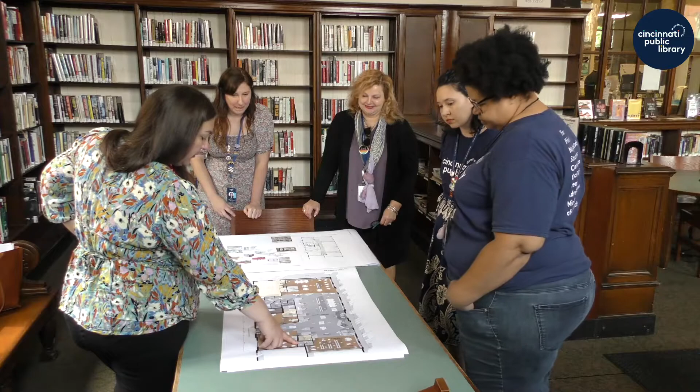When we embarked on this journey to re-envision the Madisonville Library in 2019, we were not certain what that meant exactly, aside from creating an accessible library. What we did know, however, was how much the community loved their library, and that the library was a social hub, or anchor if you will, of the Madisonville community. So that's where we started, with you all.

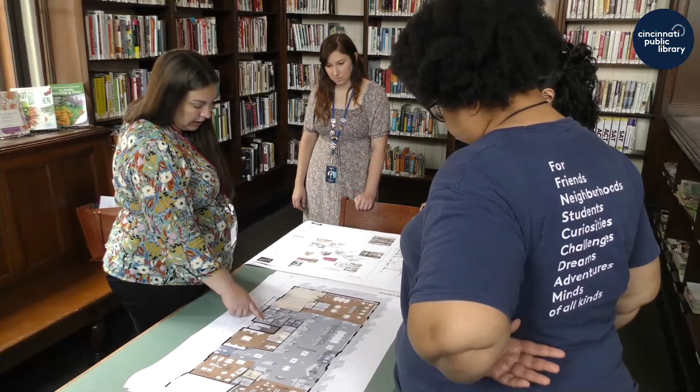Before any actionable plan was made, we wanted to first hear from the community on how you currently use the library. We held three community listening sessions, as well as three targeted focus groups, not to mention our day-to-day conversations with visitors, many of whom were unable to attend our formal sessions. It was through all these conversations that helped inform the library's vision and plan for developing a next-generation library for the Madisonville community. You all helped us better understand how our library currently supports the community, as well as envisioning how the library could enhance services in order to better meet the needs of everyone.

Through these conversations, we learned the community is looking for a library that is accessible and inclusive, not just in accessing the building, but accessible services throughout. Flexible and inviting spaces for everyone to gather and congregate simultaneously, including delineated spaces. A youth-centric facility with engaging and dynamic programming opportunities, especially targeting our after-school crowd. Increased access to technology, including laptops and makerspace equipment. Access to a more comprehensive and dynamic collection, and a fully furnished meeting space for the community.

Whether we are creating vibrant spaces for our after-school crowd or creating an environment for customers to browse the collection comfortably, it was apparent creating flexible spaces was a priority. As GBBN takes us through the design layout, we are hopeful everyone sees their needs reflected in the design. But first, I will hand it off to our customer experience manager, Justyn Rampa, for just a quick review on the facilities master plan, which led us to where we are now.

Thanks, Terry. Hello and welcome to our video presentation of the Madisonville Design Reveal. I am your Customer Experience Manager, Justyn Rampa, and here is the agenda for this presentation. I will talk briefly through the Facility Master Plan slides before turning it over to your design professional, Sean Cottengim from GBBN. I do want to acknowledge this design project here in Madisonville is driven by the Facility Master Plan, which is a concerted effort to make improvements across all of Hamilton County at each of our 41 locations.

We spent all of 2019 developing the plan, talking to the community, talking with architects to get a comprehensive assessment of the state of our physical buildings and identify what we could do to improve the experience for all of you across the county who use our libraries each day. As you might imagine, the buildings vary, the needs vary, and the communities vary. And so, with the Facility Master Plan, which is presented in full on our website, it is a very holistic way to address those needs.

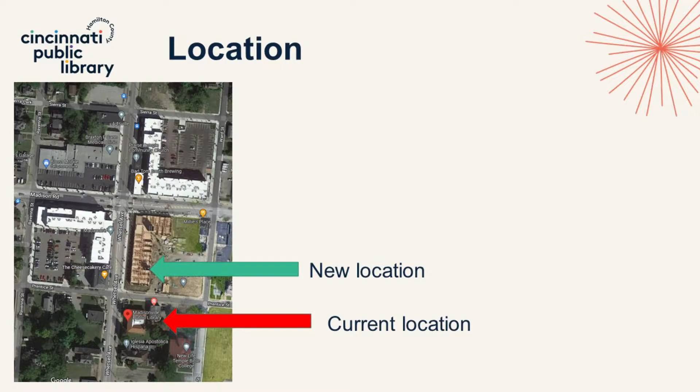We are very excited to be here today because we have made it to the Design Reveal presentation for your new Madisonville Branch Library. For reference, because I know it can be hard to remember what we shared last year in our engagement session, here is an overhead map to show where your current location is and where the new location will be. Here is also some basic information about the project before I turn it over to Sean for a deeper dive into the design reveal.

I also wanted to take a moment to acknowledge that we are here because of you. You use the Madisonville Library. You have talked with us over the past 3 years as part of this process. Your feedback was invaluable and is why we are this far along in this project today. Despite all of the disruption that we have faced over that time as a society or as individual humans, you have stayed engaged. We are so excited that we are going to be able to have a grand opening for your new Madisonville Branch Library later this year.

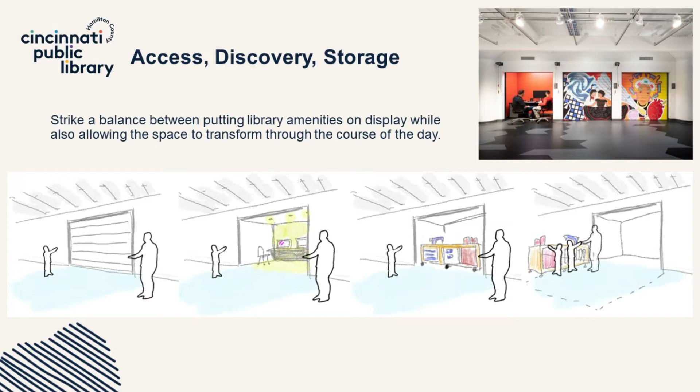One architectural move that we looked at to try to do this was to devise a way to have access, discovery, and storage, particularly of the technology elements. What you see here is an image of a roll-up door that provides half of a space that opens up into the marketplace and really allows that activity to come to life. It is also a storage element, so instead of just a closet, it allows all the pieces of that activity to live inside that cubby, but then when it's opened up, it's accessible, it's on view, and it can kind of create that space out in front for people to encounter.

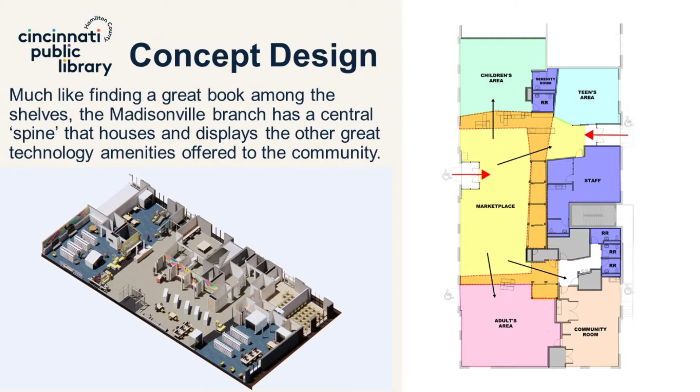Taking that more broadly into the plan that you see here, the spine is what we ended up calling this. This is an architectural element, and if you think about the way that you might encounter a good book when you peruse the shelves of the library, this is sort of the bookshelf of technology. So the spine encircles the marketplace and helps define the marketplace, but it also presents and stores these technology elements throughout the space. The plan here shows that there's the marketplace, and it's also flanked on the other side of the spine by the children's area, the teens area, the adults area, the community room, and then the staff space, all using that threshold of the spine to help define the territories of each program.

Zooming in a bit more, you see a picture here of that spine element. On the left is open up and in use—someone is doing a demonstration, there's a work cart, there's a discussion or activity in place. Next to that is one of the bays, but closed down so that you can still see what's going on inside.

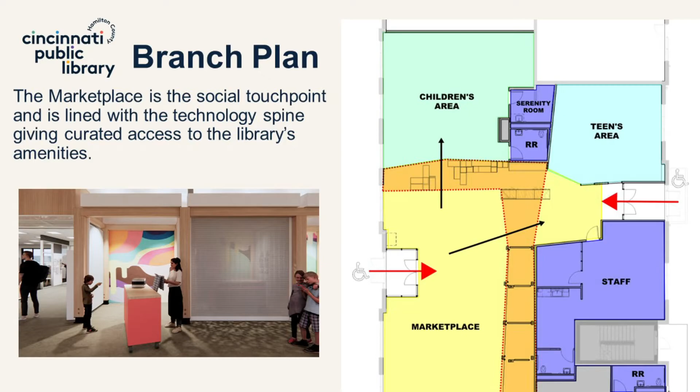Zooming in again to the plan, we see the marketplace with access from Whetsel. The other red arrow shows access from the parking lot side. So the marketplace really has two main entrances, both from parking and from the street side. Again, the children's area to the north, the teens area to the northeast, and the marketplace is that big social touch point. Looking at the lower half of the plan, we still see that anchor of the front entry on Whetsel. Into the marketplace, we see adjacencies to the adults area and the community room, which is meant to be a larger meeting space that can be rented out during business hours, as well as potentially after hours.

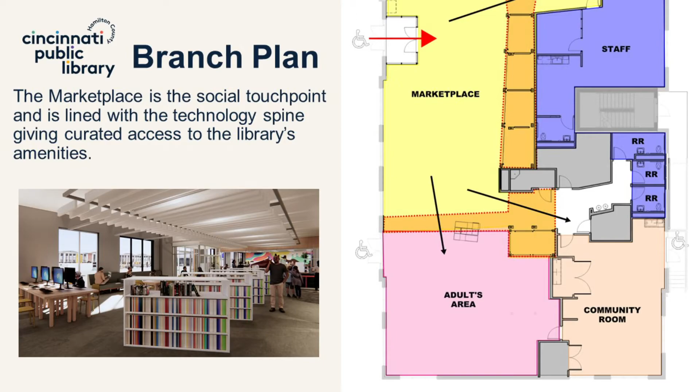Heading back to the south of the plan, we see the same threshold to the adult area. We see bookshelves, an activity room to the left, again some of that display seating here in the foreground, as well as casual seating, computers, and quiet study pods provided to the space.